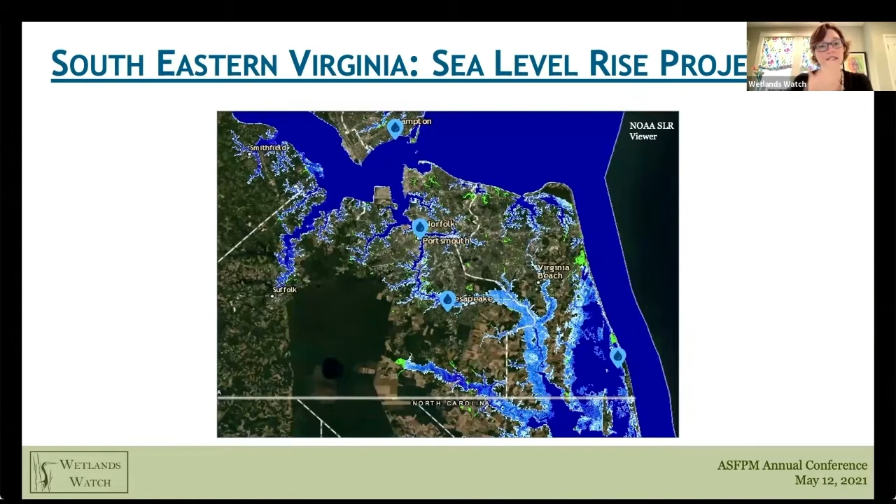So high risk area. In Hampton Roads, or southeastern Virginia, which is where this project is located and where Wetlands Watch works, we are looking at planning estimates based on the NOAA intermediate high curve of about 1.5 feet by 2050. That's a doubled rate from the past century, and about 3 feet by 2080.

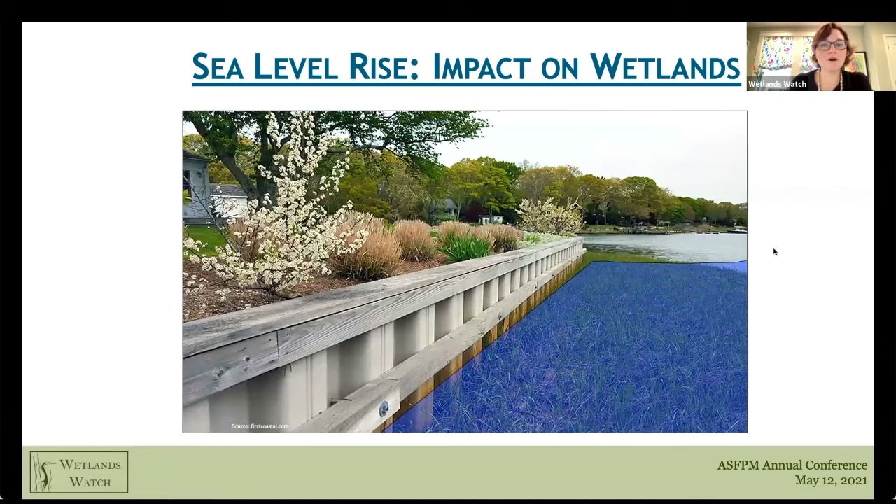Virginia can lose about 50 to 80% of its vegetated tidal wetlands in the coming century if there aren't modifications made to allow for species to migrate into the shoreline. At Wetlands Watch, we're working to identify solutions to this problem.

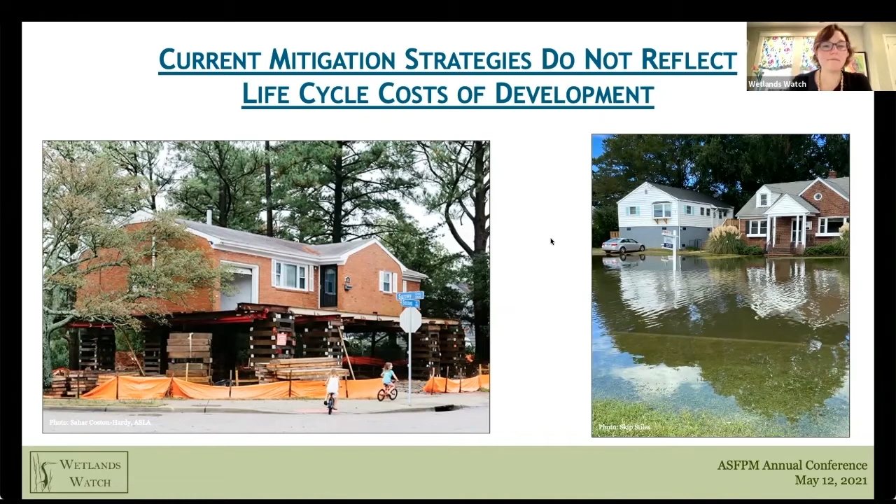We know that elevation is essential to protect people and properties, but it is definitely a short-term solution, and our local governments, utilities, and emergency service programs are ultimately on the hook to service these properties, and the roads are still underwater, frequently putting people at risk. Home elevation specifically won't work in areas where flooding looks like this multiple times a year. It's going to take a lot of money to maintain services when this is the type of inundation happening with some varying frequency.

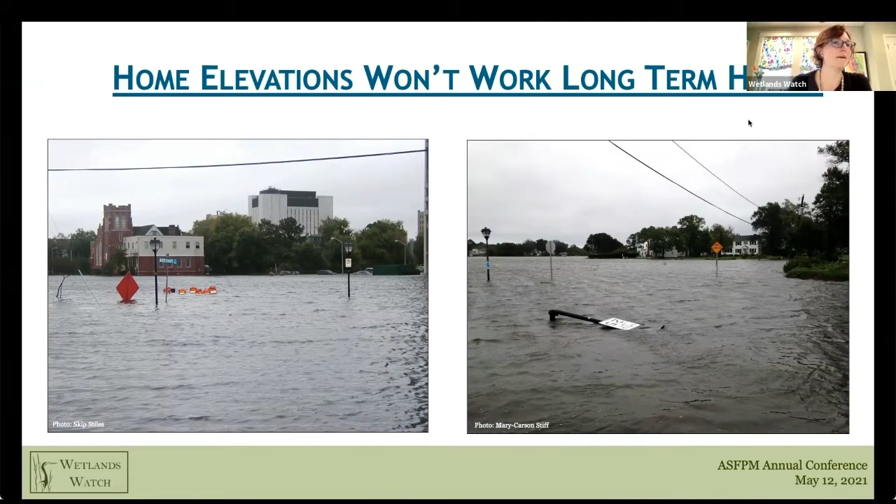The picture on the right is my neighborhood, so I feel like I'm living this firsthand, and I know that the only solution in this area is to get people and structures out of the way. The risks are too great and the inundation is too severe. These are both taken in the city of Norfolk on areas where there's no storm in sight, maybe just a strong wind during a fall high tide.

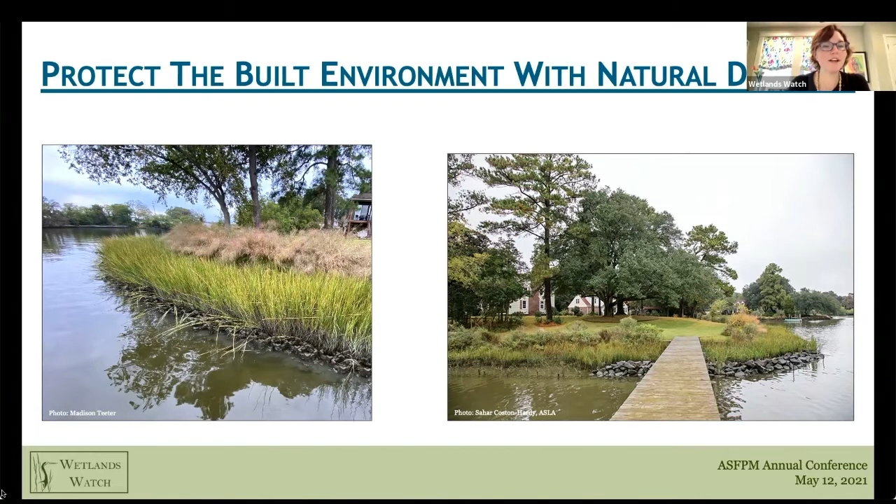So at Wetlands Watch, we're thinking a lot about how to use nature to protect our shoreline properties. This type of protection offers the opportunity, when it's planted and installed correctly, for the wetland species to migrate landward. It's what happens once the species migrate towards the houses where the real challenge begins. And that's one of the reasons why we're working on this pilot. We're running a multi-year project that explores how to remove people from risk using land conservation and adaptive land management strategies.

Our pilot is in partnership with a local land trust, the Living River Trust, working in two cities that are suburban and urban. We know that buyouts are becoming increasingly popular across the country, as buyouts and acquisitions are the most effective way to reduce flood risk. Our pilot is exploring how we get people out of the way, and when they're out of the way, what do we do with the land that remains?

If there's going to be more buyouts, that means more vacant land. In our urban and suburban communities where we're working, these vacant lands are invariably in residential neighborhoods, and they're checkerboarded throughout, which is how everybody is experiencing acquisitions in a residential context. So how do we turn this negative community impact into something positive? Can we develop programs and policies that could be exportable to other communities struggling with the same issues?

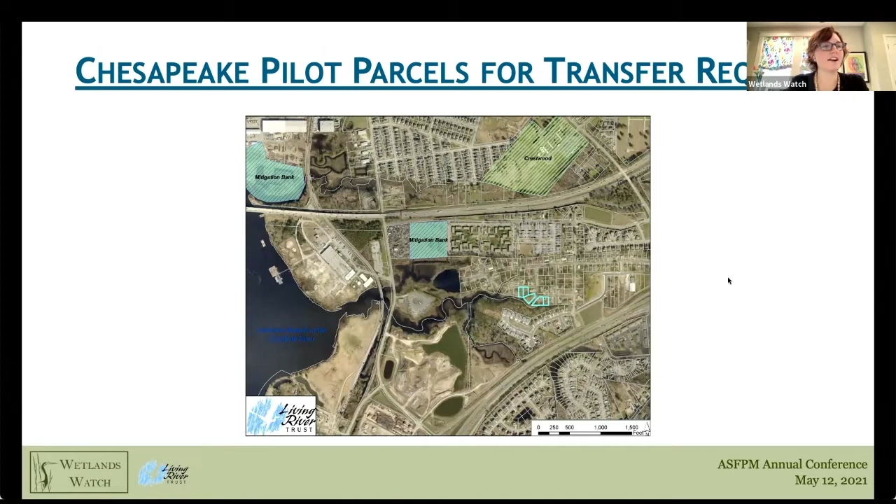So here's a look at the five parcels that were proposed by the city. You can see that there's quite a lot of flood risk in this area, with a lot of the different creeks that you can see coming from the southern branch of the Elizabeth River.

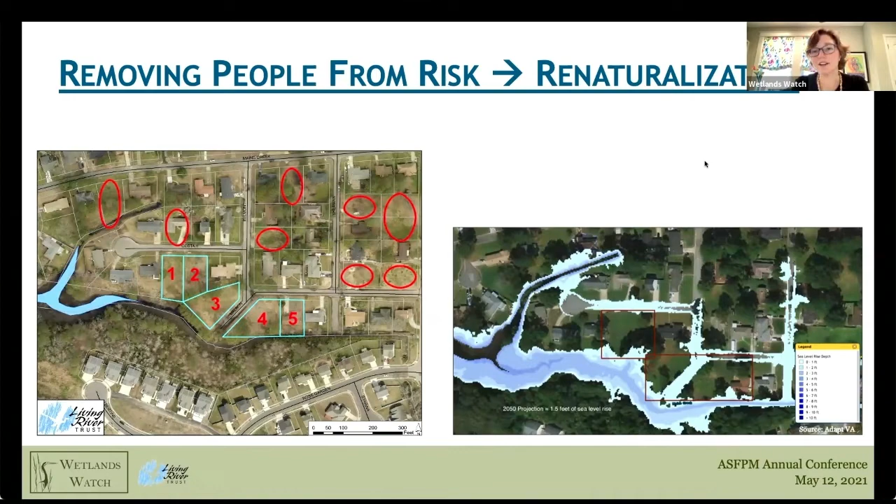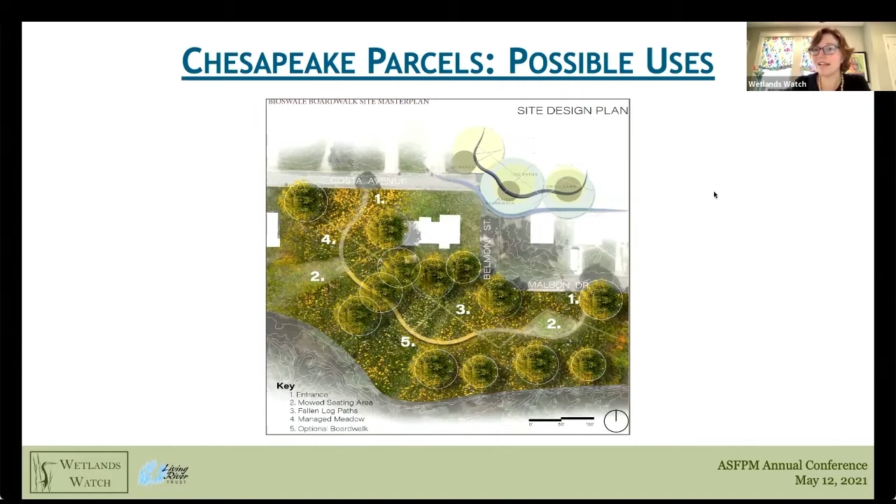We've actually had students from Virginia Tech's architecture program create some designs based off the space and visits, not quite in person because of COVID, unfortunately, but using drone imagery and satellite imagery. They created some options for how a park could be created, or how the parcels could be transformed to reflect the interests of the community, as well as reduce the maintenance for the land conservation organization.

So you see they superimposed actual images of the parcels. You can see the existing structures with some different ideas about how to engage with the space. Really cool opportunity, right? This could be great for the land trust, could be great for the city of Chesapeake, but how do we actually get it done?

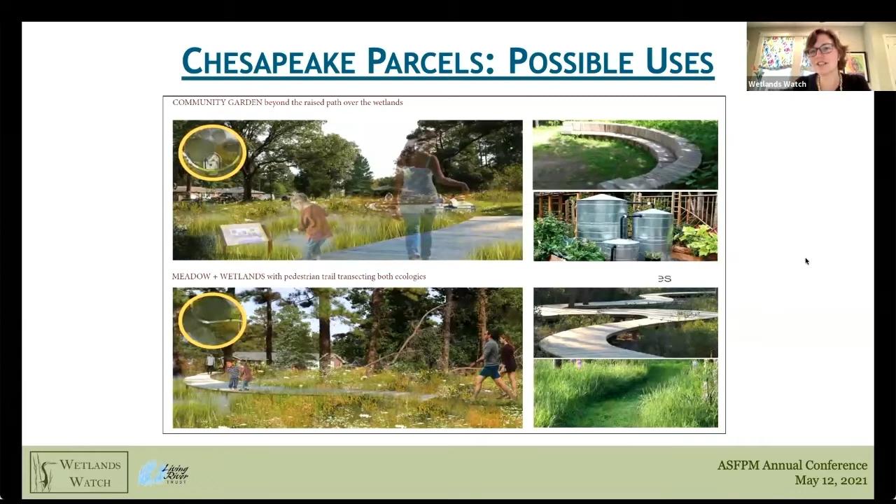We know there are 2 land trusts that have agreed to transfers of FEMA acquired properties elsewhere in the country, in Alabama and Mississippi, but the local government has stayed involved, and all the legal documentation, which I'm going to talk about in a second, was not modified to reflect the land conservation community's practices, but was just adopted verbatim. I'm sure that's because the city was still involved and on the hook for a lot of the reporting, enforcement, maintenance, et cetera - the things a land trust would really be thinking about if they were to be the long-term steward and owner of the properties.

So the governance docs - how do we figure out whether or not this can work? Let me back up and say that this pilot, these 2 different projects in the city of Norfolk and the city of Chesapeake, involves a multi-year effort with lots of different stakeholders and what we call thought leaders at the table, working through a lot of the big issues related to the execution of the 2 pilots.

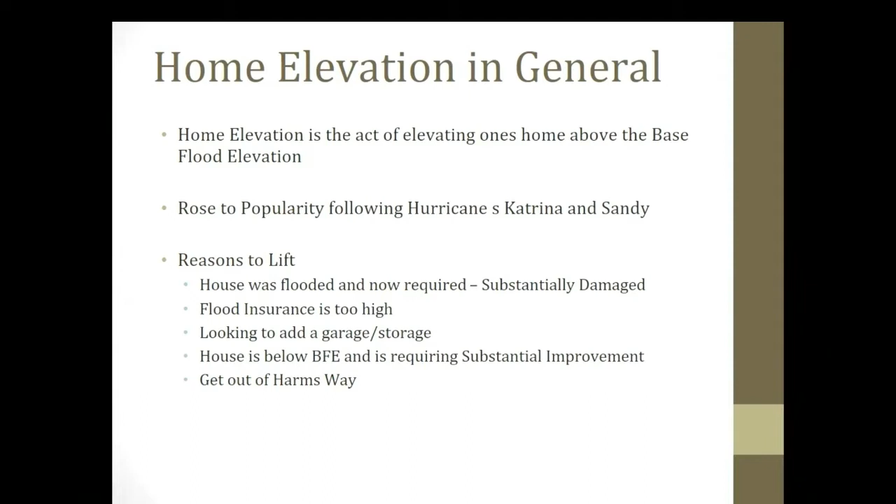Why would you elevate? Well, most people in this session know that flooding is the most expensive disaster type in the United States. Most people in our field know that the NFIP is over $20 billion in debt to the US Treasury and has often been in debt. It's been very hard to manage the National Flood Insurance Program because of the risky properties it's insuring.

Another reason to elevate is subsidized insurance rates are starting to readjust to actuarial rates through Risk Rating 2.0, and we are starting to see where people's insurance rates are becoming difficult for them to afford. If they don't do any type of mitigation, many people will just be forced out of their properties because they will not be able to afford flood insurance.

Flood mitigation projects reduce the risk of flooding and keep flood insurance rates affordable overall. Every dollar spent on mitigation projects saves between $8 and $11 in disaster recovery costs.

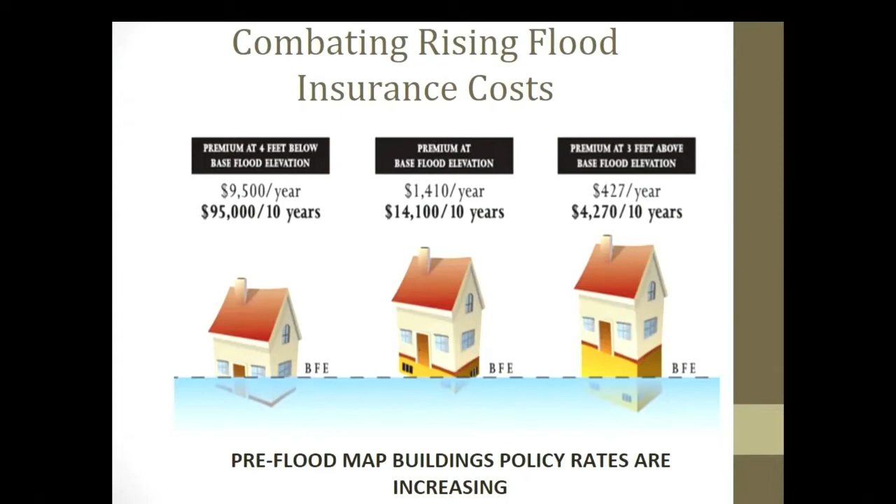This just shows a homeowner, like if you want to elevate your home and you think elevation might be expensive, if you actually take a look at what your insurance premium is going to be without elevating your home, you can see where the elevation is going to save you some money actually in the long run.

So sometimes people think if the houses are too tight that you can't get in there to lift them. And usually these contractors are skilled and they are able to do that.

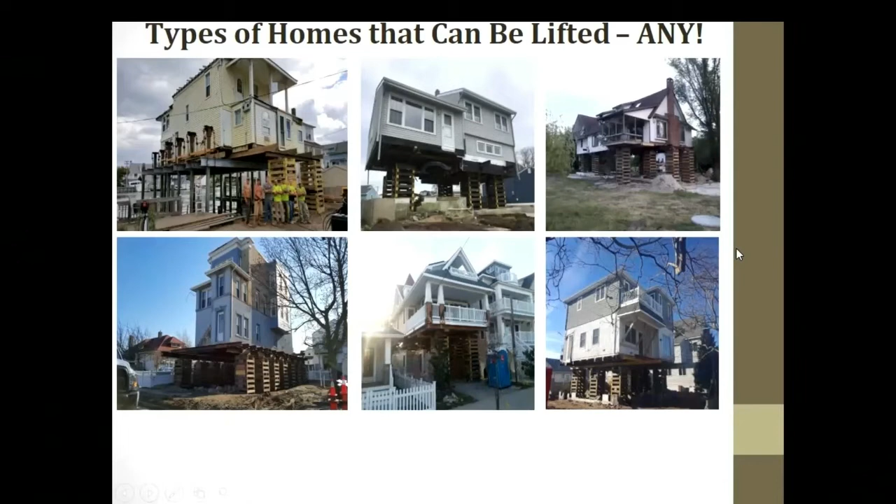So this is just a little bit further on what types of structures can be lifted. Basically anything, homes with crawl spaces, slab on grade homes can be lifted - that's very common in the South. Split level buildings or buildings with attached garage can be lifted, and masonry homes, as I mentioned, can definitely be lifted safely.

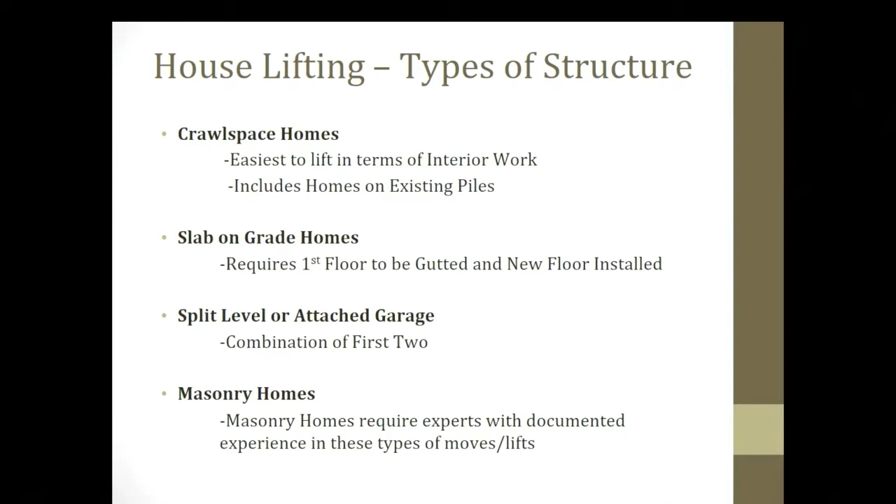Just one little comment on safety and equipment as far as home elevation goes. Most companies now would be using a unified hydraulic jacking machine. This system makes it possible for that building to be lifted up in a unified way, where it's all going up at the same time, as opposed to different sides of the house going up a little bit here, a little bit there. That unified system controls the lift, and with that, it makes these lifts very safe, and allows the structures to stay intact during that lift and during the whole project.

So the equipment now that structural movers, structural lifters have, it is so specialized that it really preserves the integrity of the buildings that are being lifted or relocated.

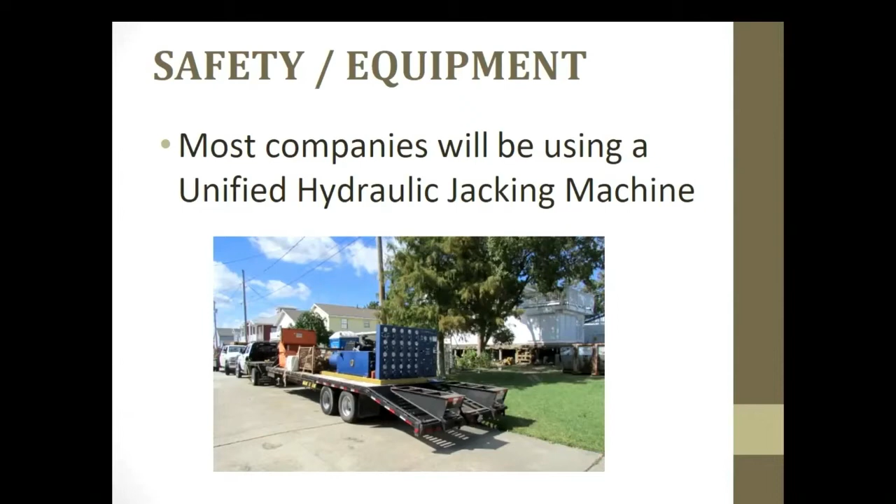So what's the process of construction as you start a home elevation project? You saw a little bit of that in our video, but this is kind of the things that a homeowner would go through if they were doing a home elevation project. First thing is the disconnects of utilities. There probably will be a little bit of pre-lift demolition as they're clearing out impediments on the property, including maybe the old foundation.

Then you'll work on the actual home elevation or the lift. After the lift, there might be a little bit of post-lift demolition. Then pilings, footings, or foundation, sill plates and the like would be installed. Then the house will be set back down. Then the access to the home, the type of work that goes on outside with decks and stairs and the like would happen. After that, you do the rough-ins of all the utilities, then any exterior or interior improvements that need to be done.

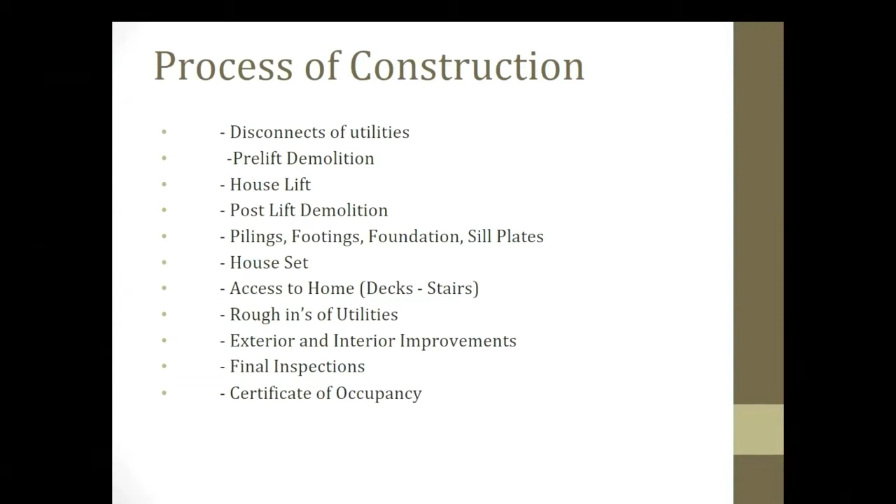And one of the things that I liked about the home in our video that we showed, you could see from the video that there was very little to be done as far as exterior improvements after that lift. And that building in particular too, there's really not much to be done on the interior. Some folks move in without doing any type of interior improvement at all post home elevation. Then you'd have your final inspections and then work on getting your certificate of occupancy.

There's a lot of financing options available for people with home elevation projects. We do see people that are just spending their own money - they're spending their own cash on a home elevation project.

They just do not want to go through a flood event again, and they're choosing to use their own money. Equity financing is always a possibility if people have equity in their home. We've seen local grant funding, state grant funding, and matching grant funds available in many areas. ICC dollars, or the increased cost of compliance dollars.

If a building is insured through the NFIP and became over 50% damaged, they would be eligible for $30,000 through their NFIP policy to use for home elevation. There's the 203K loan mortgage tool, different types of disaster recovery money, post-disaster mitigation programs, pre-disaster mitigation programs and funding. And in the Storm Act that recently passed Congress, they created a revolving loan fund, which is slated to be available in 2 years, which will again offer funding to homeowners for home elevation or other mitigation techniques.

So how does elevation help homeowners? Well, their home becomes resilient. They get a new foundation, they're higher, they're up to code, their home is mitigated from future flood damage, their home is now at the correct BFE. They hopefully will not experience any more economic or emotional costs that are associated with terrible events such as flooding. The flood insurance rates for that home decrease to their lowest level if their home is elevated and they install the proper flood vents on their new foundation.

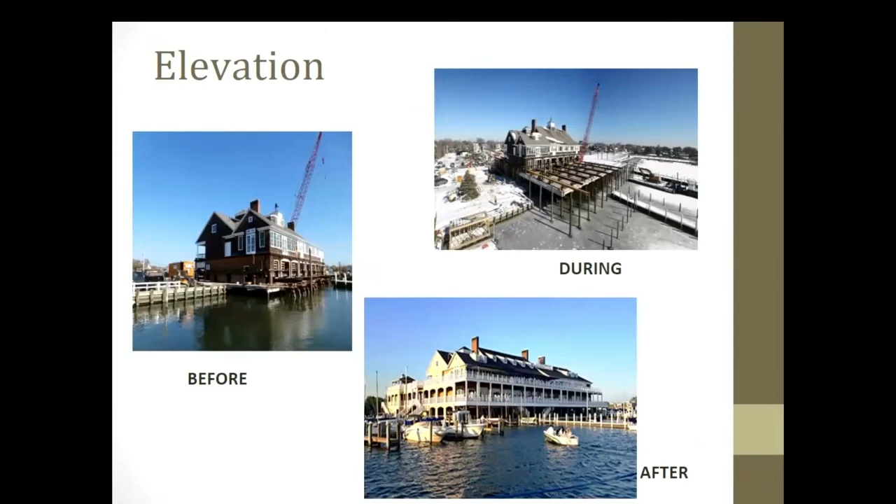Just some pictures of different elevation projects. This is a very large scale project, but it's interesting seeing how the work was done. This is a picture of a lower elevation with an open foundation on the bottom. I always think this particular house looks like it's been there forever. I wouldn't have guessed that it had been elevated.

This home is actually in Mandeville, Louisiana, and you can see the high elevation with the open foundation. Just an absolutely beautiful building that is now mitigated from future flood damage and is going to be a beautiful home for a family for many years to come. In this town of Mandeville, I think the estimate is that 76% of the town has been elevated now, so all of those families are going to be safe from the floods that have happened and likely will happen in the future.

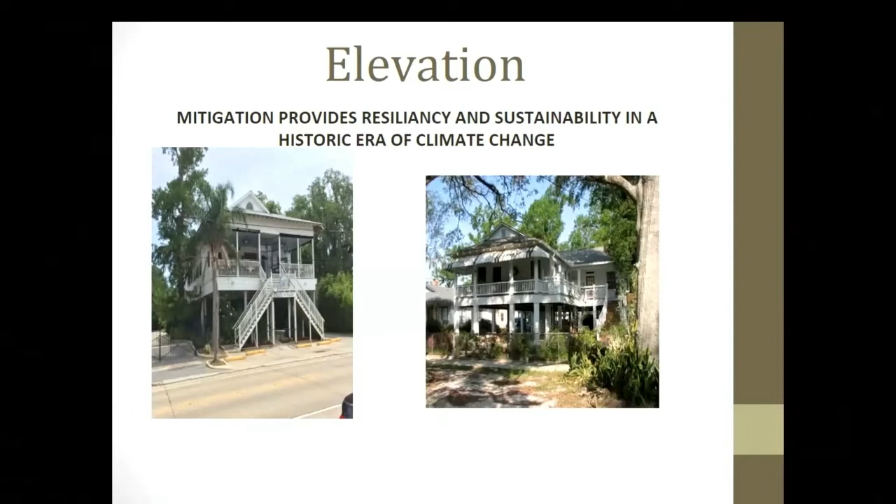Here's a few other pictures where buildings were elevated with some type of enclosure. These buildings have that open bottom you can see, and just a wide variety of how things look after they've been elevated. A lot of this depends on where in the country it's happening.

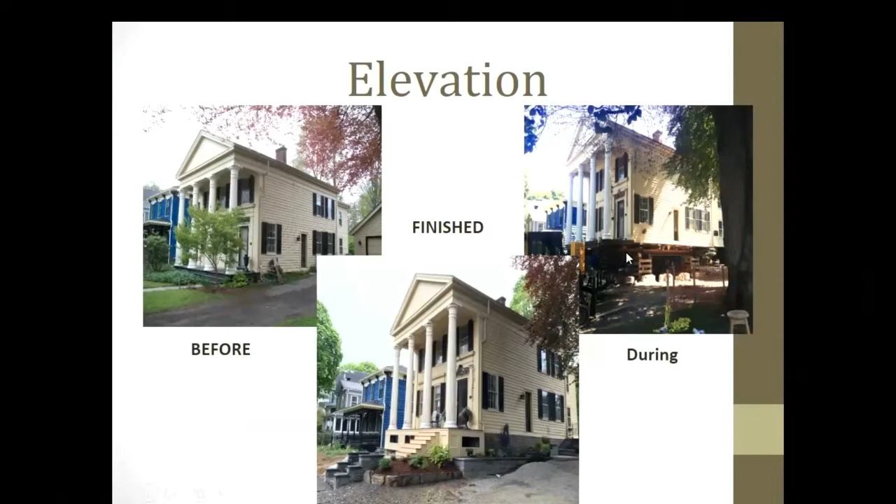So we always use a little tagline: elevate before it's too late. In certain areas, we know for sure it's going to flood again, and this is one way to mitigate properties from future damage.

I've talked about all the different reasons for elevating - preserving the tax base, we think, is one of the strongest ones. We do believe homes can safely remain in their flood prone areas, depending on where they are and the velocity of those flood waters. So in many areas, this is a viable option. It keeps communities together, preserves the tax base, and helps us deal with our housing shortage.

Other things we think about are: is it right for the individual, and is it right for the community? Many communities suffer when homes are torn down in their areas. If they can't ever build on that property again and have to maintain it forever, and they have a housing shortage problem, communities can end up in trouble after too many buyouts. And then, is it right for the country? There's so many things we have to think about when talking about mitigation of properties.

Right now, I just recently read that the average single family home - the cost of building that home - has gone up like $35,000 in the last year because of the explosion of cost for building materials. So when you talk about what type of country we want, home ownership is one of the staples really of the United States, and elevating homes allows many families to be able to continue to be homeowners.

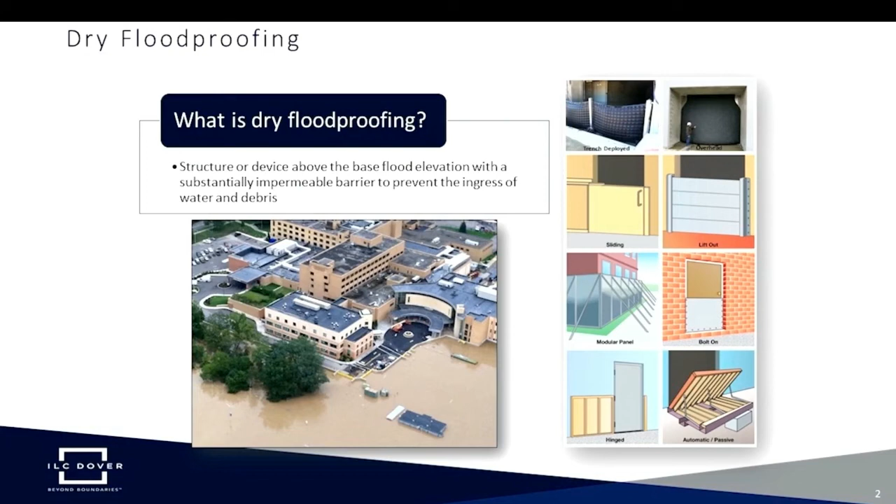However, you must remember to look at the entire picture when specifying a system. Since some passive systems lay horizontally on the ground, they may require significant ground space depending on the design flood elevation, and may create a trip hazard during low-level flooding.

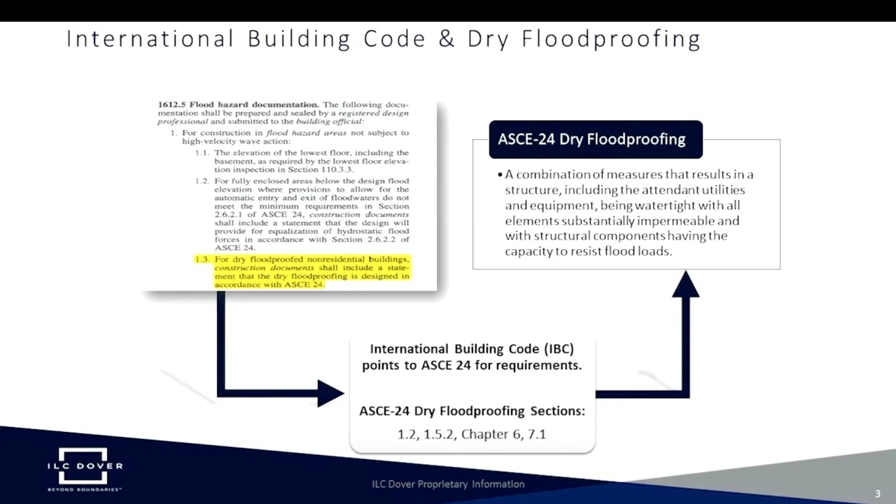The International Building Code points to ASCE 24 for guidance on dry floodproofing. When should dry floodproofing be used? When all other means of protection have been exhausted.

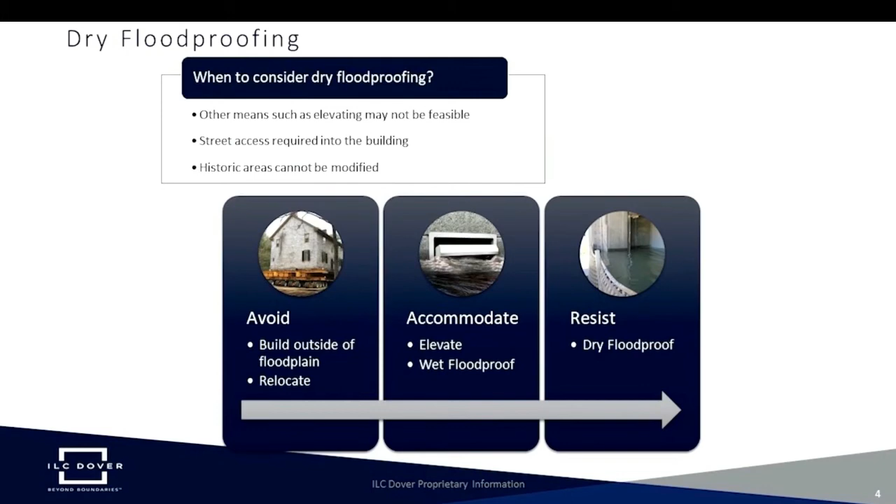This radome was designed to withstand Category 4 hurricanes and has been operational on a repurposed oil rig in the Pacific for over 12 years without any issue.

Notably, the inflatable dome interfaces to the oil rig via a clamp that captures an encapsulated rope, which we refer to as a deadman. The deadman concept can be found throughout various ILC products as a way to terminate and seal between soft goods and hardware. We'll touch more on this later.

Some of you may remember the Mars Pathfinder surrounded by airbags bouncing around upon landing on Mars. Those airbags were made by ILC Dover. The robust, abrasion-resistant base material was Vectran, which is the same material used on our tunnel plug system designed for the Department of Homeland Security to hold back 30 feet of water pressure for anti-terror purposes. We also produce many of the blimps flying around your favorite sporting events.

ILC Dover was initially asked to provide a custom point-of-use system after the flooding events of Hurricane Sandy. We have taken the lessons learned through thousands of hours of research and development, value of point-of-use storage, ease of deployment, and acquisition cost, and these have led to our current generation of dry floodproofing products.

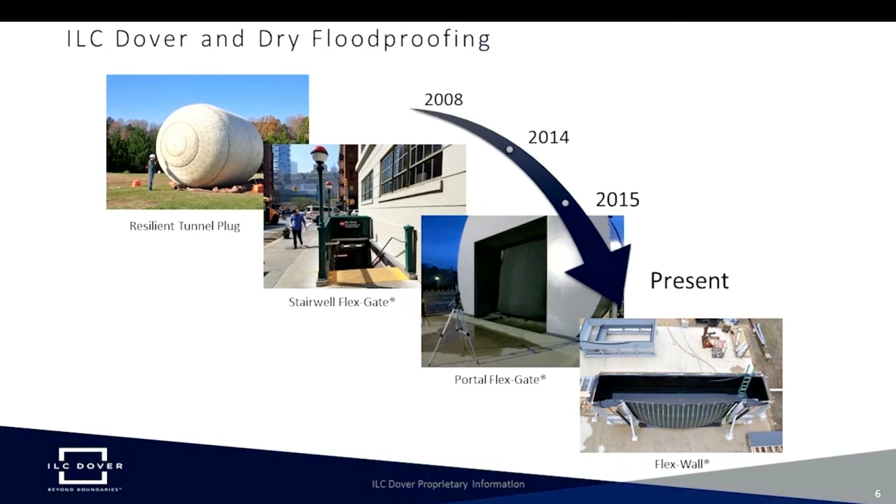Post-Hurricane Sandy, we were engaged by the New York City Transit to discuss flood-proofing solutions. We discussed current and future state needs with them. Their existing solutions took 4 people, 6 hours per stairwell, and there are hundreds of stairwells throughout the city.

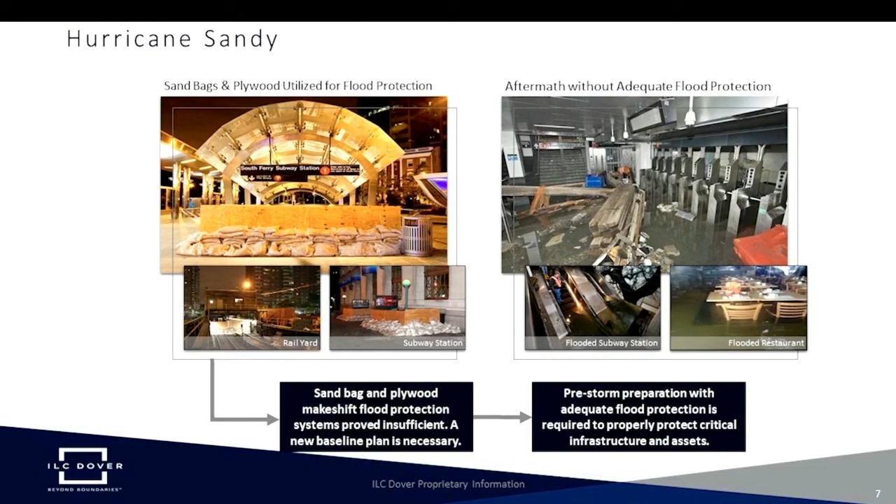With New York City Transit, we developed our Stairwell Flex-Gate technology that's being used at over 70 sites throughout New York City. The Mitigation Assessment Team report was done by a team of well-respected floodplain engineers after Sandy, and discovered that flood shields on site were, in many cases, never deployed.

Based on their findings, this was due to a lack of training, but also a lack of understanding of how the systems worked. Manpower was also an issue, as many of their systems required teams of people to deploy, and those resources were unavailable.

Using the findings of the Mitigation Assessment Team report, we can define the key requirements for an effective floodproofing system: reliable, easy to use, reusable, and stored at the point of use.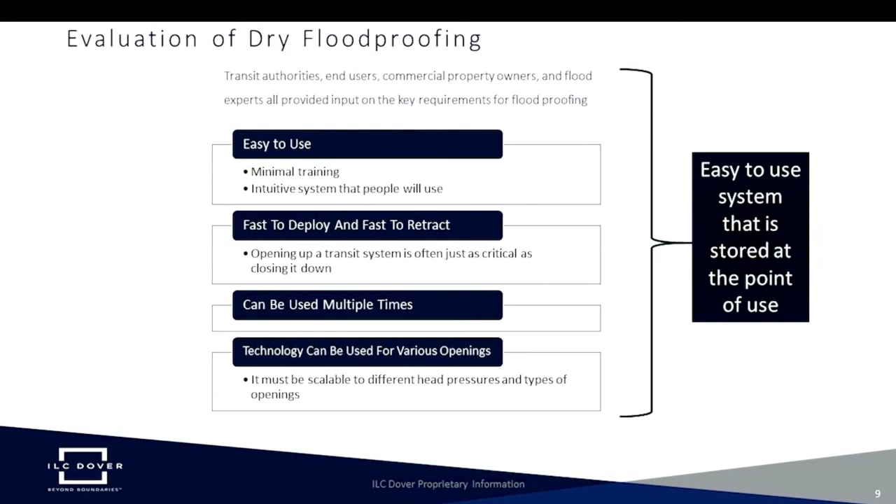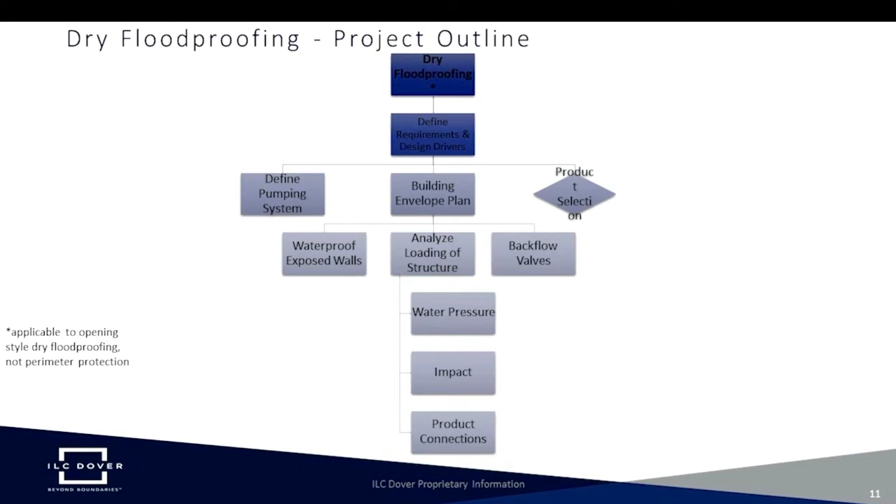Key requirements for a dry floodproofing project are base flood elevation, design flood elevation, impact requirements, leakage requirements, quantity of deployment personnel, and temperature range of operation.

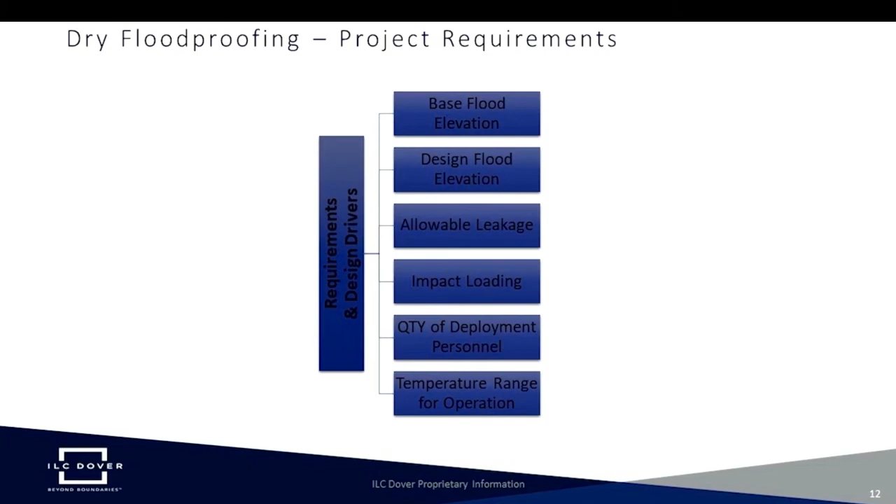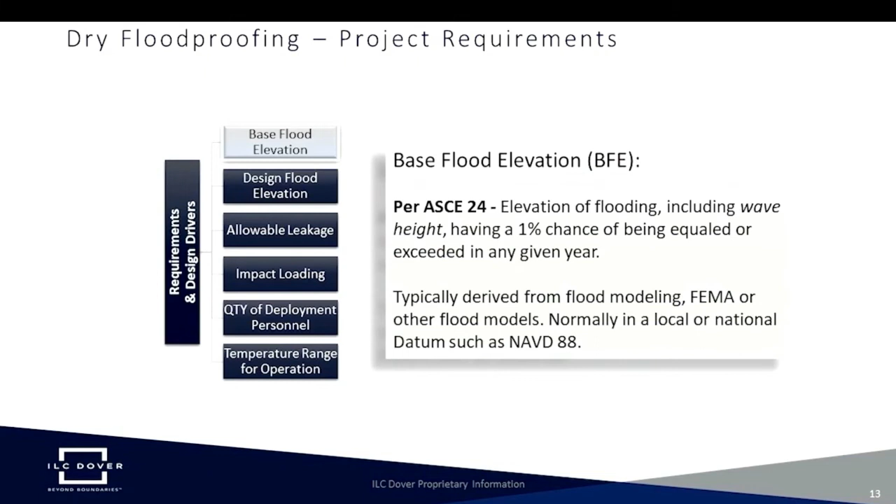Base flood elevation, or BFE, is the elevation of flooding, including wave height, having a 1% chance of being equal or exceeded in any given year. This is typically derived from flood modeling, FEMA, or other flood models, and it's normally in a local or national datum, such as NAVD 88.

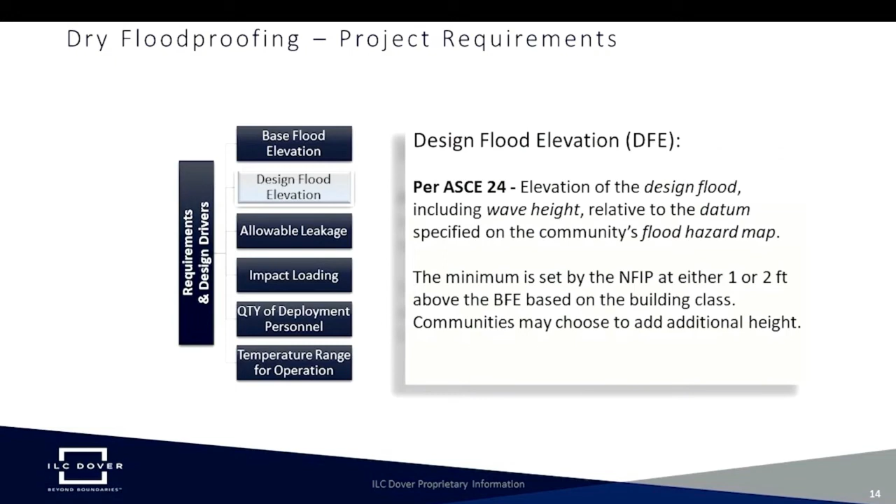Design flood elevation, or DFE, is the elevation of the design flood, including wave height, relative to the datum specified on the community's flood hazard map. The minimum is set by the NFIP at either 1 or 2 feet above the base flood elevation, based on the building class. Communities may choose to add additional height, known as freeboard, to the design flood elevation.

Allowable leakage is based on the amount of leakage the overall system protecting the building may allow and remain substantially impermeable. Per ASCE 24, to remain substantially impermeable, the building or space must have a maximum accumulated water depth of 4 inches during a 24-hour period.

The square footage of the building affects this calculation, and every potential leak point in the system, such as a pipe pass-through or crack in the foundation, may affect the entire building.

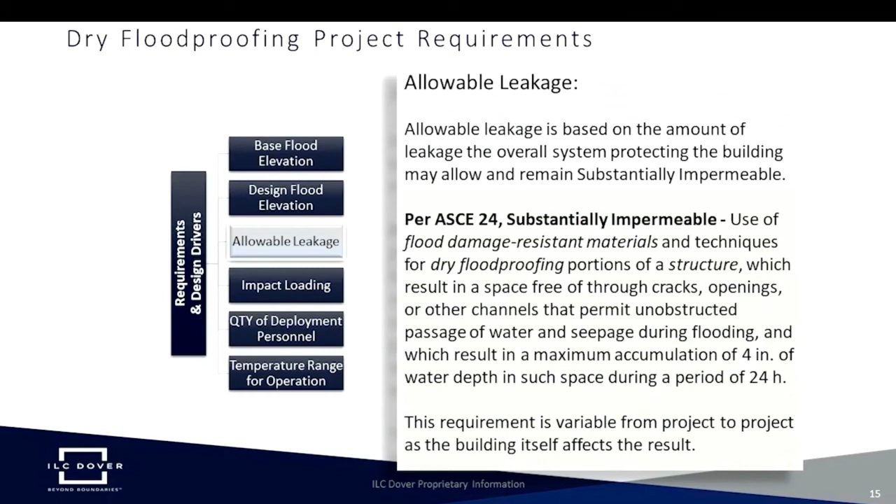Impact loading is the loads on a structure caused by flood-borne debris striking the structure. This requirement is often overlooked until late in the design cycle, and debris impact may ultimately be the requirement that determines if the dry floodproofing system works in the real world or not.

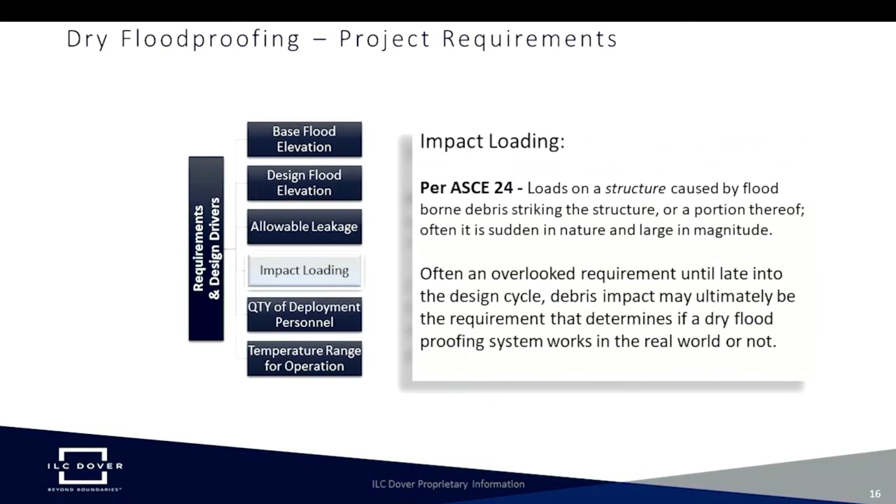Quantity of personnel: enough personnel must be available to deploy all flood mitigation systems for a property within 12 hours. Another requirement to consider is temperature range for operation, as this may affect some of the design drivers.

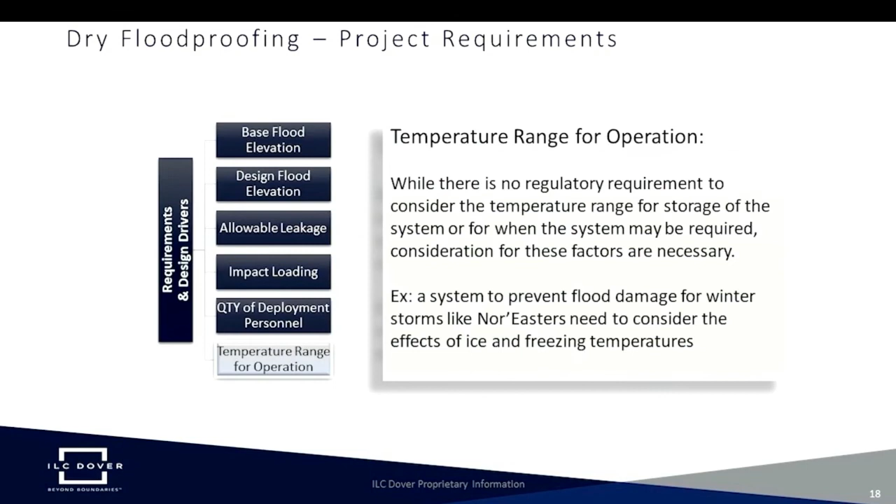Once the previously mentioned requirements are defined, product selection can begin. Product selection should be based upon system-level attributes. These attributes must be traded against your day-to-day operations, as each site and customer is unique. There's no one-size-fits-all solution for flood protection. The system-level attributes, which we will discuss, are broken down into 5 main categories.

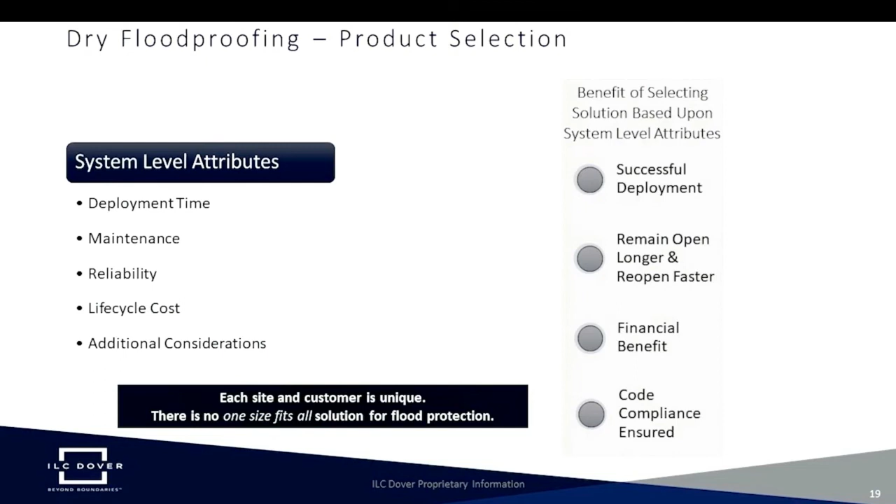Deployment time is critical when selecting a dry floodproofing system. Codes require the time to deploy a floodproofing system around a designated dry space to be no more than 12 hours from notification. System storage location and transit time play a large role in the overall deployment time of a system. Systems not stored at the point of use must consider transit and pickup time when determining total deployment time from notification.

While on-site storage may require the use of a forklift or other motorized vehicles, off-site storage is further complicated by the fact that the parts will need to be transported through a sea of people all combating traffic in an attempt to evacuate.

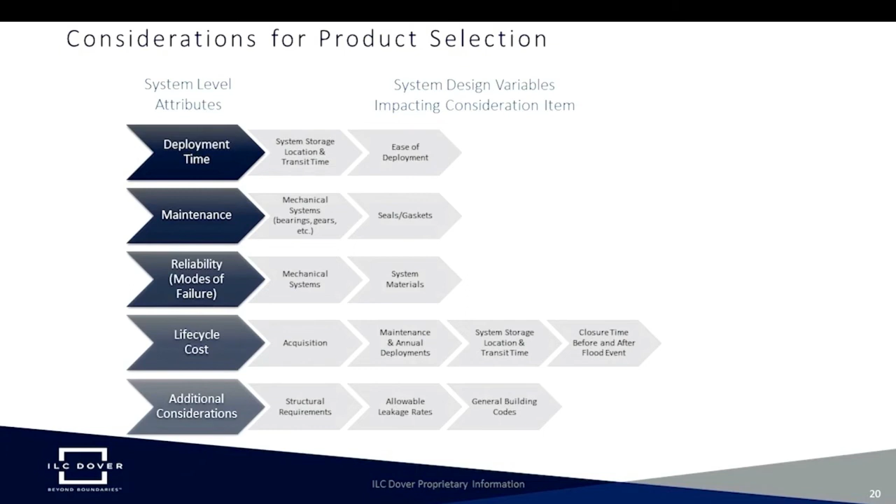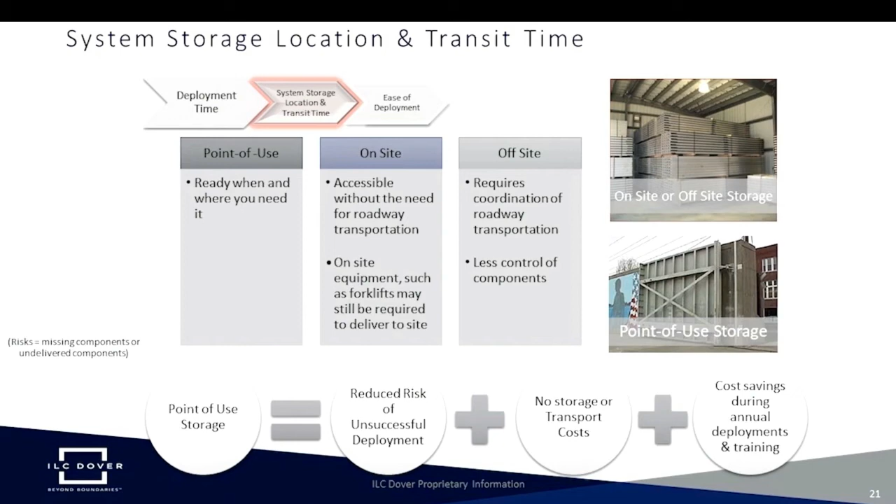In addition to transit time, overall deployment time is heavily determined by ease of deployment. Ease of deployment is primarily impacted by the type of system, quantity and type of components, as well as the weight of the components.

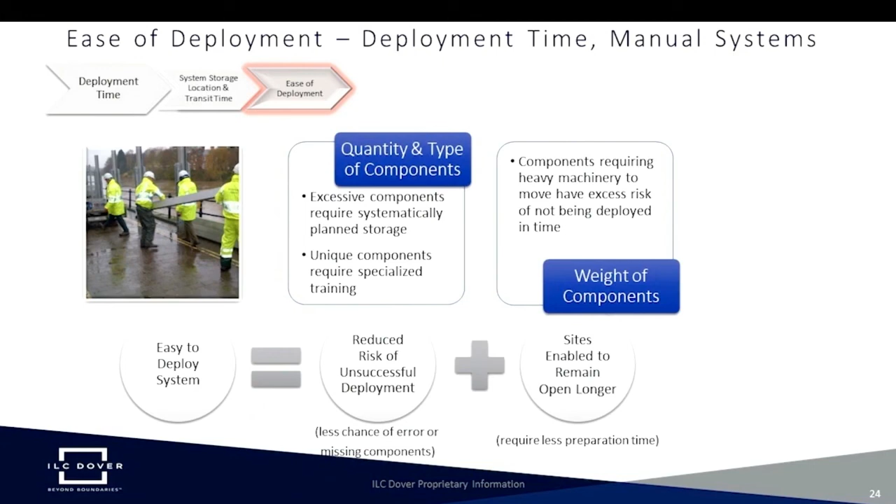There are 2 distinct types of systems, with a third which represents a middle ground: passive systems, and manual systems with a mechanical advantage. The reliability of a system is highly dependent on the materials selected to construct the system.

Since most people have a general knowledge of corrosion experienced by plain carbon steel and know the benefits of utilizing stainless steel, we will focus on the material selection and utilization for sealing interfaces. Neoprene, EPDM, and silicone are all common materials used in dry floodproofing systems. Each system has its pros and cons, as shown here in an excerpt from Rogers' Technical Sealing Guide.

C-set, also known as compression set, is an often overlooked factor. If a sealing material has a high compression set value, it will not readily rebound and will be less reliable when compressed time after time.

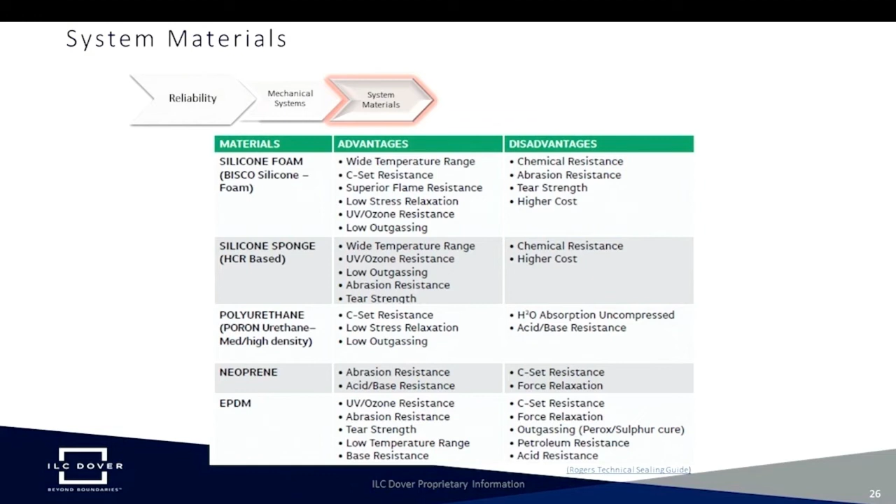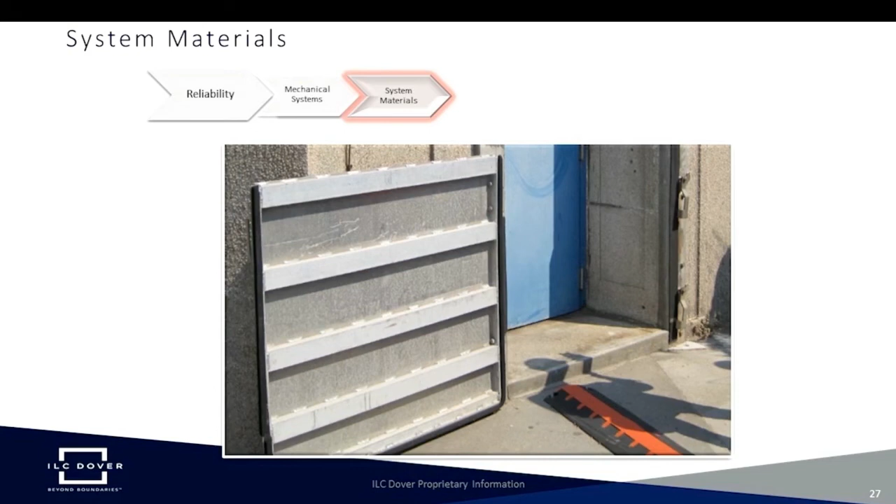The gaskets shown here are no longer connected to their systems. This may have occurred from unintentional or intentional human interference or environmental factors. Imagine being on an industrial site with a pallet jack or cart. As you maneuver it around, objects are occasionally bumped. If one of these objects happened to be a seal for a floodproofing system, it may be damaged and not repaired until a maintenance cycle occurred, thus rendering the system less watertight than required.

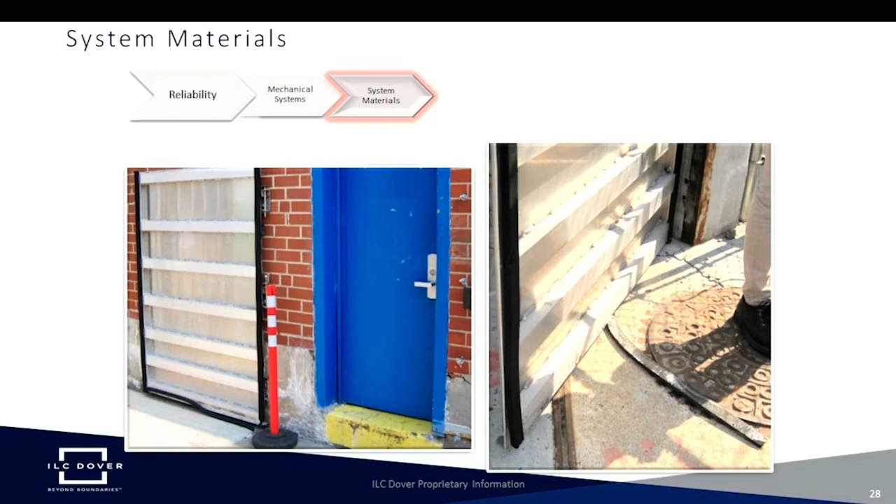Acquisition cost is often the most focused on aspect related to cost when selecting a dry floodproofing system. However, the life cycle cost, which is the sum of all recurring and one-time costs over the full lifespan of a system, can have a larger impact on the total cost of ownership than one may think. Many of these items have already been discussed relative to system operation and functionality, such as storage, maintenance, and inspection. But it must be remembered that they all also impact the overall life cycle cost.

One item that we have not heavily touched on is closure time. Closure time can be relative to the time required to deploy before an event, to retract after an event, and the time closed for training and annual deployments. The closure time can be linked to cost, as goods and services will be unavailable during a shutdown and personnel will be reprioritized. Some dry floodproofing systems have been designed with closure time in mind to reduce site downtime at all stages.

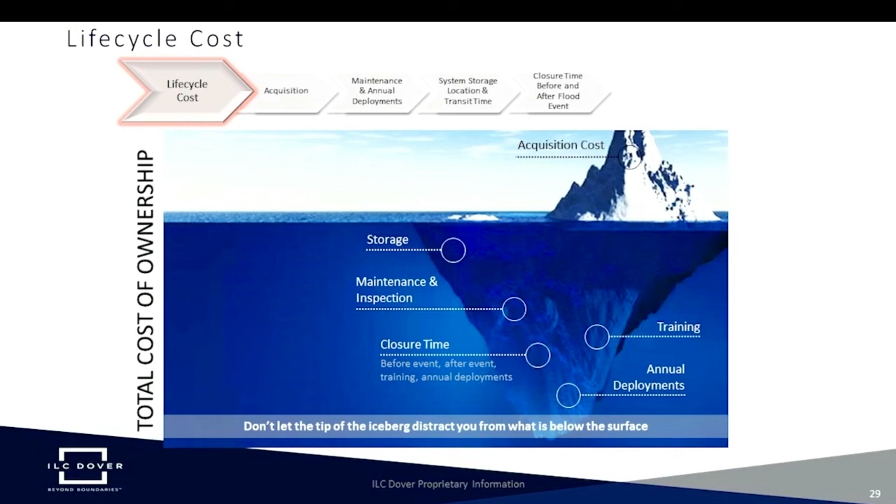As previously mentioned, building codes recommend periodic deployment of dry floodproofing systems, and locations such as New York City are now enforcing annual deployments of dry floodproofing systems. These periodic deployments are critical to ensuring your site will be prepared to deploy your system in case of an emergency. Without periodic deployments, there is no assurance that the parts will be where they are needed.

We've heard of people unknowingly using the plates for dry floodproofing as ramps, and others have simply lost their parts over time. Additionally, periodic deployments keep current employees trained so they'll be ready for a storm.

When beginning to plan your dry floodproofing system, it's important to consider that these practice deployments can have a substantial financial burden on system owners if systems are stored off-site or require significant manpower to deploy.

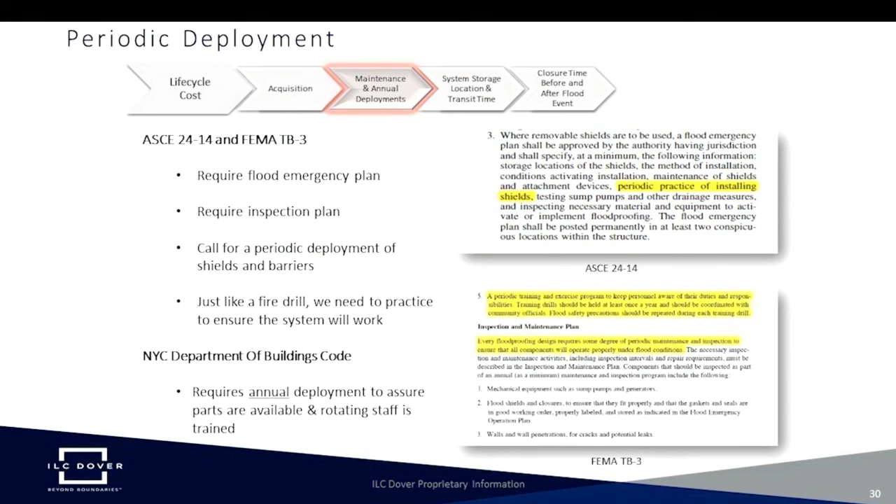For example, the Whitney Museum in New York City currently spends $50,000 a year for their annual deployment due to the location of their dry floodproofing parts and the manpower required to assemble.

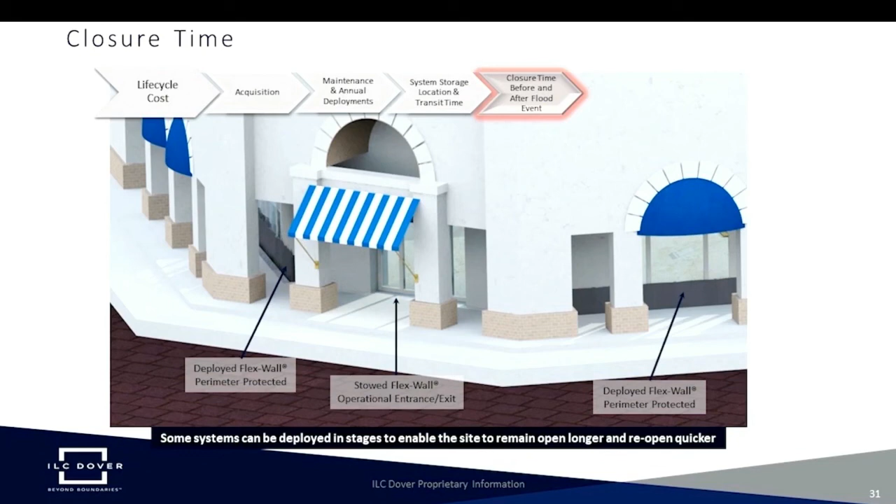Systems that can be deployed in stages provide the flexibility to keep the property open until the last possible moment before an event occurs, and provides the fastest recovery time. If the floodproofing system does not require heavy machinery to travel through a disaster zone to retract the system, then the user can reopen as soon as the threat of storm has passed and any collected water has been drained.

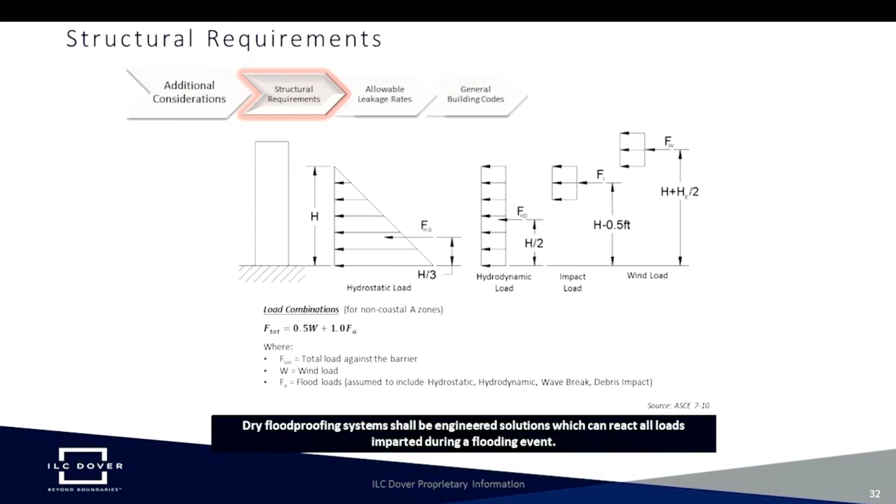In order to properly protect structures from flood damage, the entire load case must be taken into account. When protecting a vertical structure, the loads are imparted as depicted here. You must consider the combined load case of hydrostatic, hydrodynamic, impact, and wind loads, as these loads will be simultaneously applied to the system. ILC Dover takes all of these loads into account during our design process.

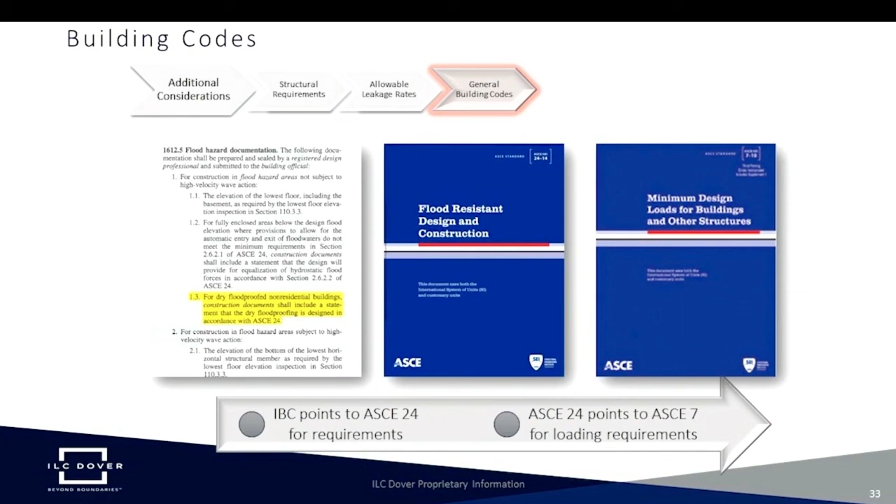While the International Building Code points to ASCE 24 for floodproofing guidance relative to materials, leakage rate, and standard practices, ASCE 24 points to ASCE 7 for guidance on properly applying the load requirements we discussed earlier.

Each site and customer is unique. There is no one-size-fits-all solution for flood protection. During the initial stages of specifying a dry floodproofing system, all elements must be considered, not just acquisition cost.

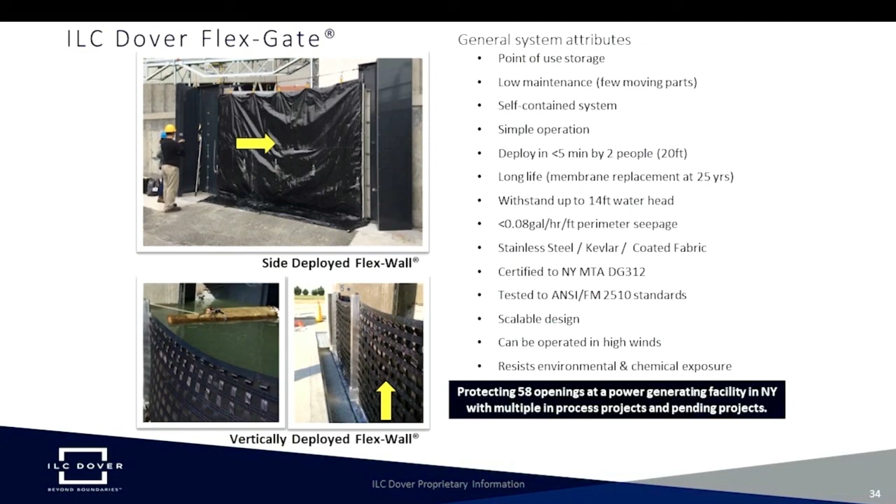Soft goods technology offers many benefits that allow ILC to respond to customer needs. Low stowed volumes, easy to deploy, point-of-use storage options, low maintenance, and high reliability are just some of the system attributes that ILC Dover Flex Wall and Flex Gate systems have.